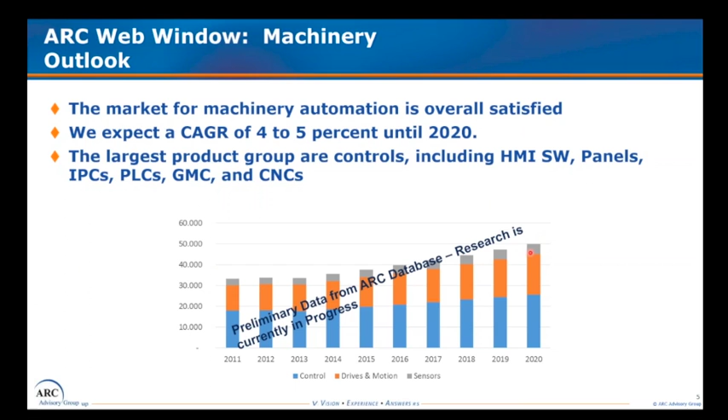Now turning to megatrends, the big trends that we see across all markets and regions that have a global impact and also impact the machinery market. People get very enthusiastic and optimistic talking about these megatrends because they see the opportunities in them. But we have to point out that especially in the short and mid-run, the business cycle has a far bigger impact on the development of the market than these long-run trends. They have the potential to increase growth, but in the short run, if the economy turns down, if the business cycle is down, long-run trends simply are overshadowed and do not matter.

The first trend I would like to talk about is the Industrial Internet of Things and Industrie 4.0, which really means we're talking about connected machinery, intelligent devices, and modular plants and automation. These three really go together. For the OEMs, this really means that all the devices need to be able to collect and pass on information, to have a good network infrastructure in place within the machinery, and to somehow enable this plug and produce as necessary.

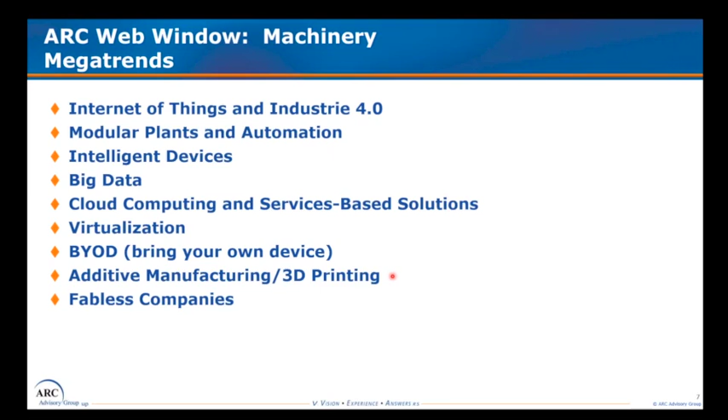It also means that we face a couple of new requirements for control. Scalability—if you have really modular production, scalability is required on a completely new scale. Also, the communication really needs to go down to the individual sensors and valves as you see it here, from a real centralized control station.

We're talking about new requirements from availability—here in parentheses, mean time between failure. This means the uptime really needs to be guaranteed. Machines also have availability or guaranteed uptime as a very important criteria, but looking at process industries which are capital intensive and hence require 24/7 production, availability becomes a completely new dimension.

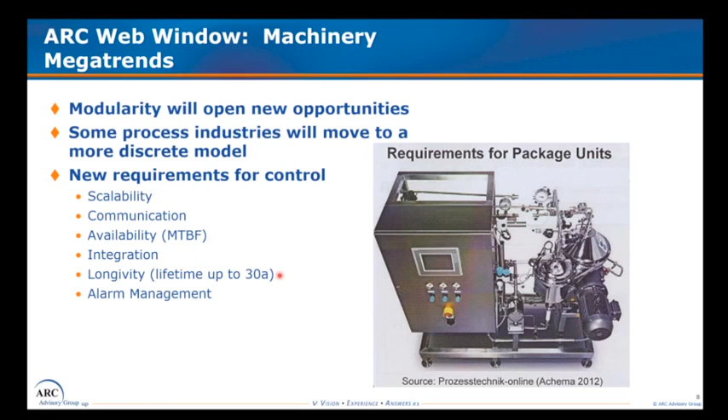And while current machinery for the discrete industries has a lifetime of, on average, between 8 to 12 years, these package units will be having a very long life cycle, up to 30 years. And we talk about very specific requirements such as alarm management as well.

Now, looking at these megatrends, we did a survey and asked around 400 people what impacts the buying decision on PLC or PLC-based PACs. What you see here on the vertical axis are the buying criteria. The most important was lifecycle support for hardware and software, and the lowest was integrated energy management. On the horizontal axis, you see the options we gave the respondents, ranging from no criteria to most important criteria.

I want to point out really two things. The first thing is a lifecycle support solution offering engineering tools. This also means that the top three criteria have nothing to do with cycle time and with scalability, because especially looking at PLCs, these controls have reached a level where they can basically be considered a commodity regarding hardware. The differentiation now is really about portfolio offering, about solutions, and the software and support delivered with the controller.

Second thing I want to point out, if we're talking about that now, is the aspect of integrated safety and integrated energy management.

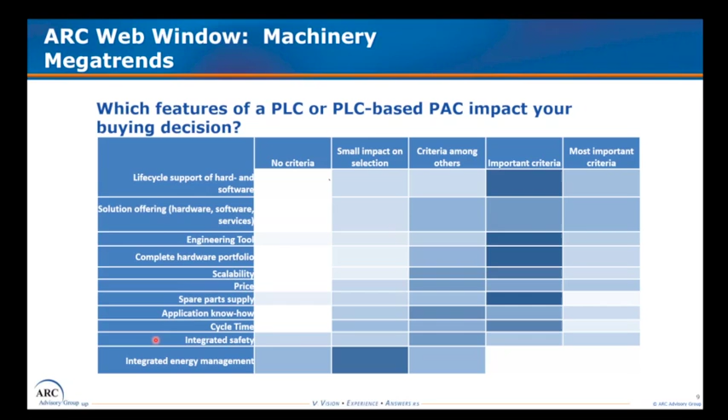And with this, I would like to hand over to my colleague Thomas Menze on the topic of machine safeguarding.

Yeah, it's my pleasure to talk regarding machine safeguarding. Thank you, Florian, for the introduction. Let's start with really a basic question, because my intention is to have all participants know a common understanding.

The most important question is really, what is functional safety? If we are discussing functional safety, it means we are talking regarding the safety relevant components of a machine control system. These components have to meet the intended reliability and the risk reduction of the machine itself. So this is really what we call functional safety. We are talking regarding the safety components. And please keep in mind, safety-related components quite often contain hardware and software at the same time. In some cases hardware is good enough, but normally you have a little software around to control the safety functionality. So what do we have to do to implement these safety-related parts?

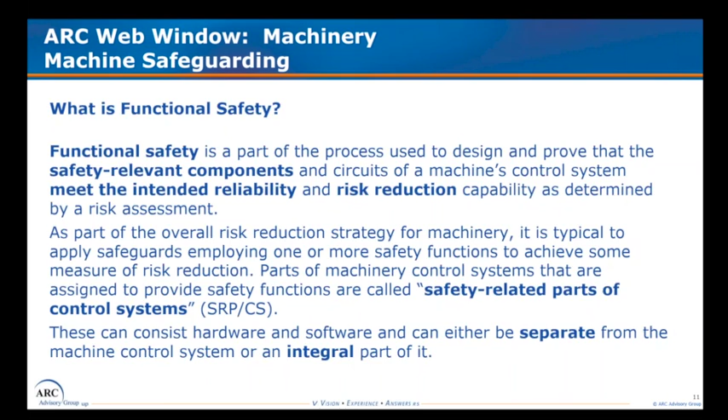On this slide, you can see on the left-hand side how to implement the safety functionality, shown in this little process diagram. First you have to do a risk assessment on your machine. If you've understood and evaluated all risks involved, the second step is to design a safety concept around these identified risks. Third, and last but not least, is to verify the safety function, to really verify that the implemented safety is good enough to keep the risk under control. On the right side of this slide, you can see a full safety-related component portfolio: the sensor, the logic, and the actuator. So if people are talking regarding safety components, keep in mind this is always a loop, and this loop normally contains a sensor, a logic, and an actuator at the end, because this loop is really responsible for acting the safety commands and doing the right things if any risk occurs.

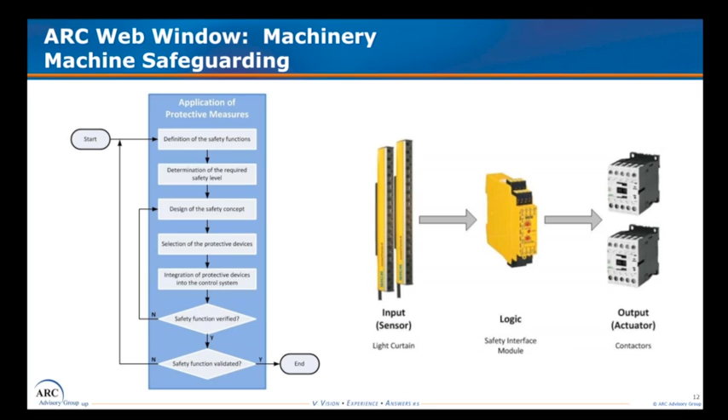Coming to the next point, we have to think about what are the standards. Are there any standards, or do we have to develop everything from scratch? The good answer here is no, of course we have standards and frameworks. Safety standards normally provide a framework for the implementation of the safety functionality. And don't forget, if you work on safety, safety has to be implemented over the full life cycle. It is not only the normal operation mode of the machine, so you really have to observe and do the risk assessment over the full life cycle. You get a little guidance from three available standards.

These three available standards are differently oriented. We have an A, B, and C standard. Normally the B and C standards are really the important ones for machine builders, because in these B and C standards there are the typical safety applications for given machines. So you have, for example, typical safety aspects in the B standards, or real examples of machines in the C standards. So if machine safety is quite new for you, it's best to refer to the B and C standards to see what's relevant for your machine type.

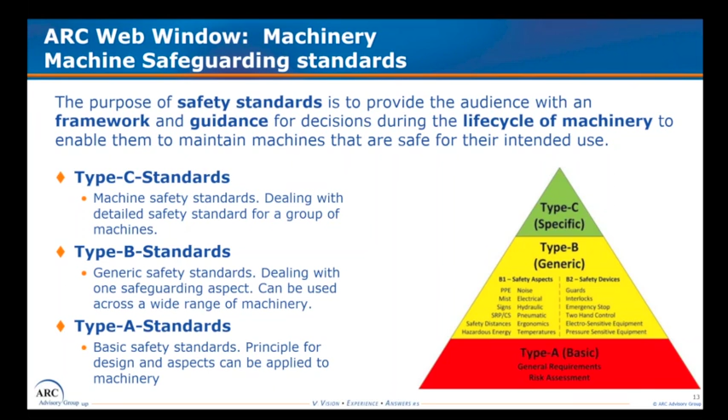Good news is SIL 4 does not exist in our industry. SIL 4 is only required in nuclear applications and sometimes in train systems, but you will not find SIL 4 in normal machines.

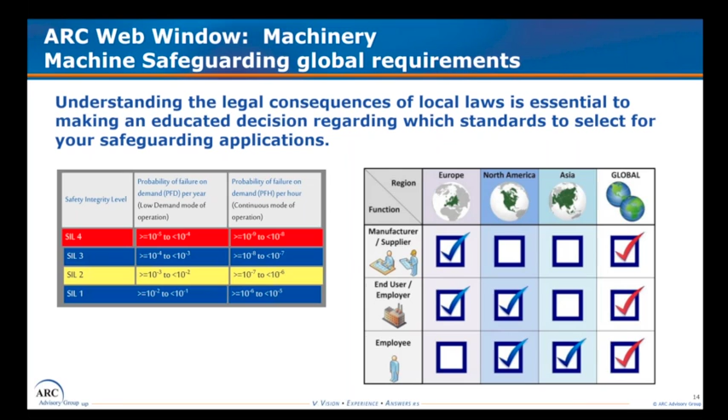Machine safety really does not add any productivity. It is really adding safety to the process, and this is shown on the next slide.

So Florian, please flip over. And here you see on the right-hand side a little scale, and you see safeguarding is explained as a balance of safeguarding, productivity, and costs. That's what I said earlier on. So you only get safety if cost and productivity is right balanced, and if you have done the right risk assessment, if you really engineer the machine itself. The safeguarding scope, the products or segments of safety aspects, are shown in the left-hand table. You see all the basic components, from top to bottom: the safety PLC, the configurable relays, the safe drive, the safety relays, and so on. These are all the components the engineers or automation people normally have to get the machine safe.

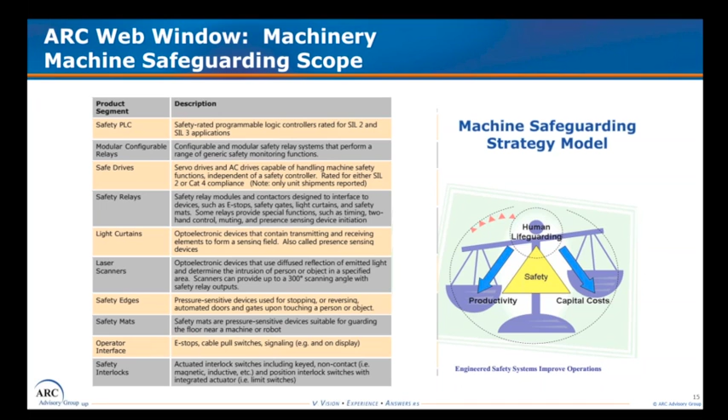I think that should be now enough for the introduction. Now we are discussing the market itself, and therefore we need the next slide, please. So here we see the machine safeguarding applications by SIL levels. If we check this overview, we find out applications like robotics, forming, or assembling require SIL 3 protection, because simply the risk is higher.

So if a robot, for example, has a collision with a human, that is normally very painful for the human. Because of that, he can be really seriously injured. The risk is quite high, and because of that, the required SIL level, so the safety integrity level, is high. Packing machines, material handling, or molding machines require only SIL 2, because the risk going out from these machines is lower. So these different risk levels really depend on the risk evaluation. You have to do the determination, you have to analyze the machine, and you as an engineer have to determine what risk reduction is required.

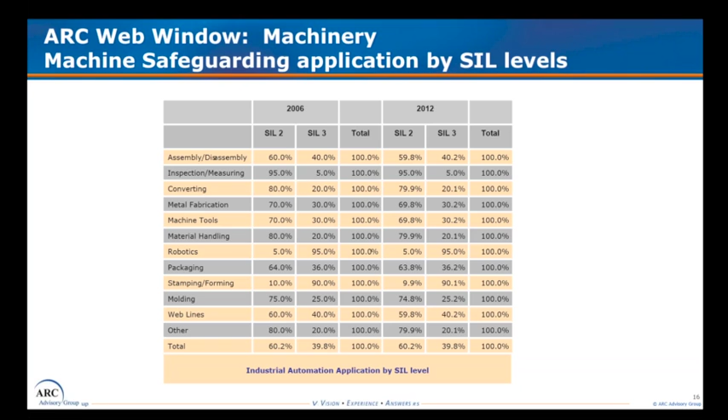Okay, if we dig a little bit deeper into the market and discuss the drivers and inhibitors, we need the next slide, please. We will find out that there are definitely drivers of this market, and that is what Florian said earlier on: higher productivity. At this moment in time, nearly every engineer tries to get more productivity in the machine, so it runs faster, it turns faster, whatever. Because of that, there's maybe more risk in the machine, and this higher productivity gains higher risk and higher requirements according to machine safeguarding. This modular automation does the same thing.

Florian explained modular automation in the first slides we discussed. And of course, if you assemble a production on the shop floor like Lego style, that means you have little production blocks and you can plug and produce those on your shop floor. There is maybe a higher risk level, so that is definitely a driver for machine safeguarding.

And last but not least, that is the last bullet point on the left-hand side: safety standards. The safety standards are from time to time increased. There must be more safety in the machines, and because of that, we have to implement more machine safeguarding. That is definitely a driver for the overall market.

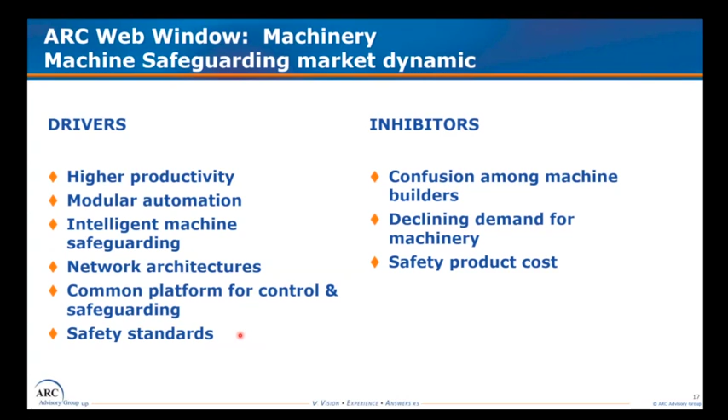So if we observe now the market itself, we need the next slide. We will see here the total machine safeguarding market from 2012 up to 2017. Definitely the overall market has a higher growth compared to the normal automation products. But please keep in mind, machine safeguarding market represents roughly 10% of the automation market. So it's a fast-growing market, but on the other hand, it's a niche market and relatively small compared to the standard automation market.

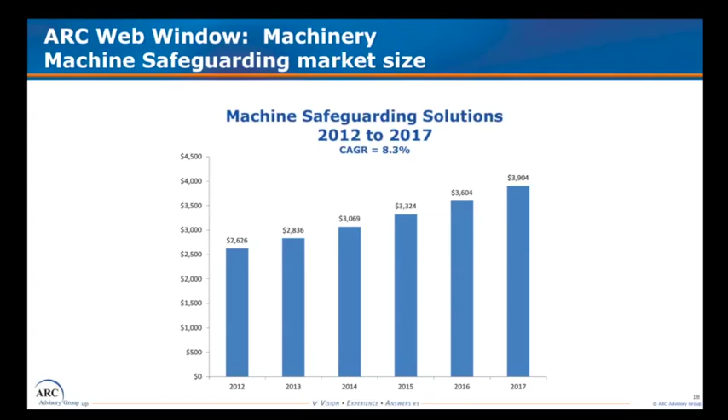So if we analyze really the individual products of these markets, we come to the next slide. Here we are, and we see there's a machine safeguarding installed base. If you analyze this little graphic a little bit deeper, you find out easily what the volume products are. And the volume products are really the operator interfaces, the safety switches, the safety relays, and the light curtains. So these products are really the driver in this market, and they deliver the highest revenue to the overall market.

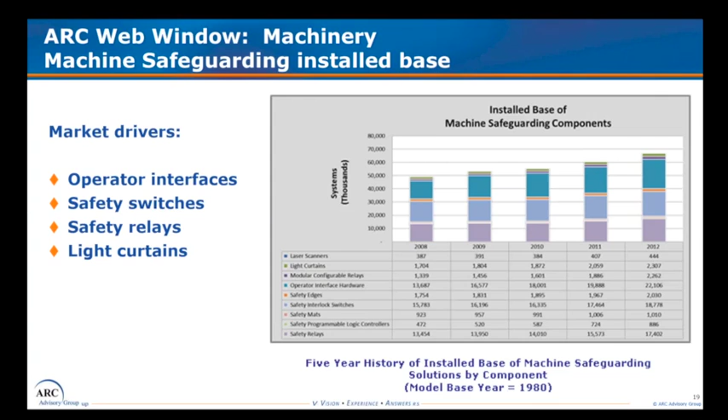So if we leave now a little bit the market and the products beside, and if we are concentrating ourselves on the market, we will find out that we have really different vertical markets for machinery, and these different vertical markets have different requirements for machine safeguarding, and you see that in the graphics on our display here.

If you analyze the graphics, you will easily find out 50% of the market is absorbed by 5 vertical markets. That means half of the market is represented by metal forming, packing, material handling, robotic, and metal cutting. If a customer or engineer really develops machines for these vertical markets, he's highly confronted with machine safeguarding.

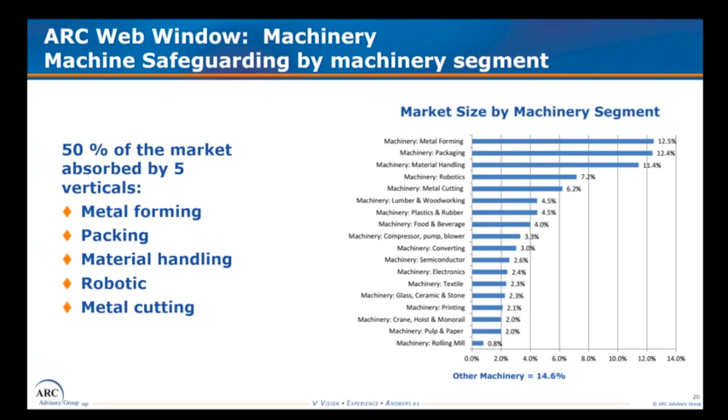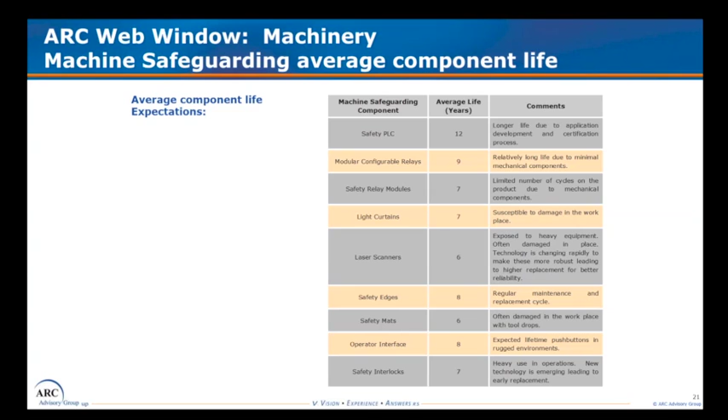And last but not least, on the last slide, here's the summary. What are really the success strategies on machine safeguarding?

I think Florian discussed this more or less in his intro: decentralized solution and intelligent technology. Intelligent technology belongs to industry 4.0 or the industrial Internet of Things. We discussed this, but the last topic, which can be quite important, is safety consulting, because safety or machine safeguarding becomes more and more complex, and many engineers struggle with that and look for third-party help. If experts are outside offering machine safety consulting, that could be a very valuable business, and definitely something that may grow very fast compared to the hardware and software in machine safeguarding.

So I think this should be enough for our little excursus regarding machine safeguarding, and I hand over back to Florian.

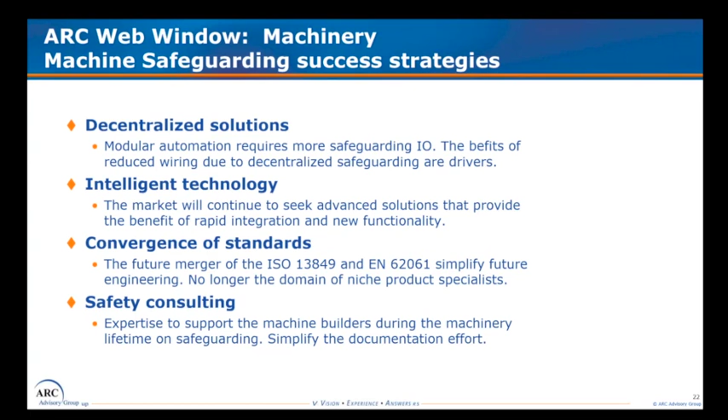Thanks, Thomas. Now, energy management — and not energy management as many people think of, big plants consuming a lot of coal, gas, oil, etc. But what can energy management do on the machinery layer in discrete automation?

Just to give you an insight first about the challenge: what you see here is the energy costs as percent of revenues, and on the vertical axis you see the different industries. It goes from 0 to 25%, and very clearly on top in terms of energy costs are oil and gas, metals, water and wastewater, cement and glass, chemical. These are the standard process industries.

Now looking into discrete manufacturing, really the top consumers, so to say, are textiles, consuming a lot of water as well as electricity. Plastics and rubber, especially injection molding machines, are very energy intensive. Food and beverage — cooling as well as cleaning with water — is very energy intensive. But overall, we don't have this huge share of energy as part of the revenue or of the cost, which also means there is not as much pressure on end users to implement energy management measures as there is on the top consumers here.

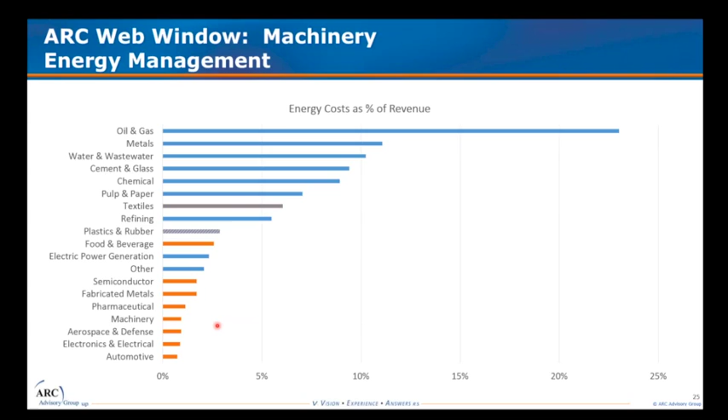Typically, energy management starts with simple metering, and unfortunately there are still many companies out there that do not know how much energy they consume — meaning energy in terms of water, air, gas, electricity, and steam. This is to many still unknown, as especially in the automotive or aerospace industries, it's often the facility management that gets the energy bill and not the production part.

After metering, we go to visualization. The visualization really starts with visualizing 1-2 meters at the machinery level, but then moves up to the complete production line, moves to analysis and reporting, which is already at the MES layer and includes management feedback. Then we go into real-time monitoring, optimization, and enterprise-wide optimization. Here it's very important at the enterprise-wide layer that it only makes sense if there are certain standards, because with these standards you can actually benchmark your facilities, or benchmark single processes or single machinery.

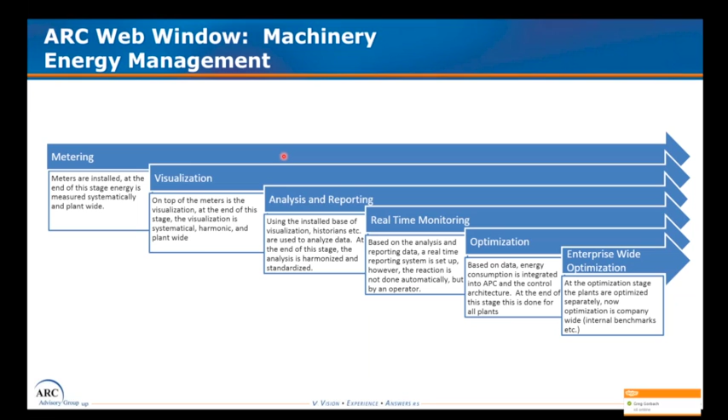For the machinery perspective, we are mainly talking about metering, visualization, and analysis and reporting. This can be supported and already done in the machinery. The latter is really part of higher level automation systems, which are typically in charge of the system integrator, EPC, or the end user.

We asked people from various industries if energy management has an impact on the buying decision, ranging from no impact to main driver for purchasing equipment. Again, discrete industries are at the very bottom. But what was lower on the cost side, automotive and aerospace, and food and beverage slightly lower, energy management does already impact investment decisions there. If you average that, you'd land at around a quarter of investment decisions where energy management has an impact.

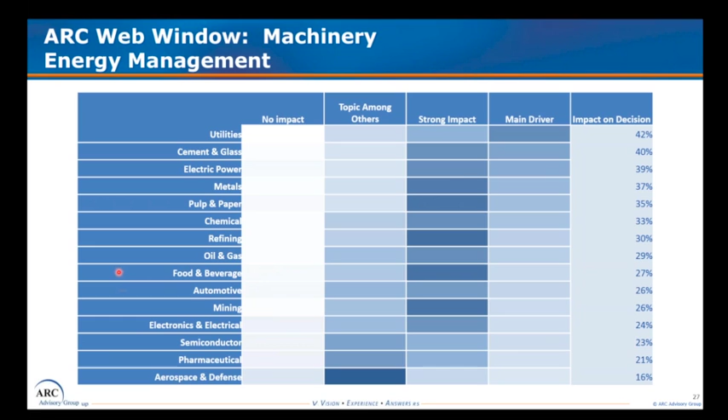One reason is that many automotive car makers, especially from Germany and Europe overall, push their tier 1 suppliers to implement ISO 50001, even though they have an energy cost share of around 1 to 2% of variable costs. So it is not only costs that drive energy management measures, it's more.

We asked what are the targets for energy management. The most important target is to reduce costs, but it also has to do with planning future consumption, optimizing overall processes. An energy efficient process is typically an overall smooth and efficient process. They need to optimize purchasing and scheduling with suppliers, pass on costs. So it's not only simply reducing total costs, although that is the most important criteria.

Planning future consumption will be more and more important as we expect. Really the scheduling with the energy supplier and utilities, as even now process plants have to do load shedding in certain parts of the world. Future cost planning - energy prices are currently down, but they are still volatile, which means it's very hard to forecast your energy costs for the next month if you don't really know what's going on in your plant and how your consumption will change. It really requires detailed measurements and deep integration.

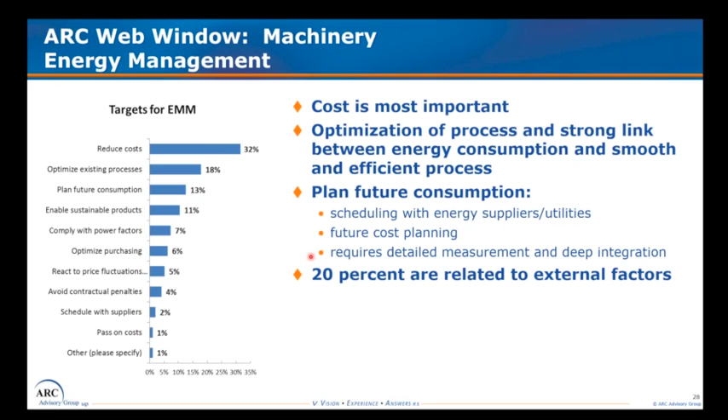So, summary of the status quo: energy management is and will remain a priority 2 topic. This is unfortunately a fact, and we have to keep that in mind. Throughput, production quality, output, safety - these are all priority 1 targets, and energy management will be a priority 2 target. Especially looking at factory automation, energy management is in its infancy.

But more end users look into energy management. The number is really increasing despite the currently low oil prices. ISO 50001 was really the fastest adopted ISO norm, many people told me in interviews, even faster than 9001. Automotive end users pressure their tier 1 suppliers to implement the 50001.

This I already mentioned. The energy costs will rise in future. Now, I know we have low oil prices right now, I know energy is currently rather cheap, but this will change. We have an indefinite demand for energy and a finite source of energy - it's very simple math to calculate that energy costs will rise in future.

We have an increasing number of end users that force their OEMs to integrate energy management right from the start. We had a few interviews with companies from the electronics industry, and they say energy is an important cost factor, and they want their OEMs to enable them to read out the machine's consumption data directly, rather than having to install meters and everything in parallel later on.

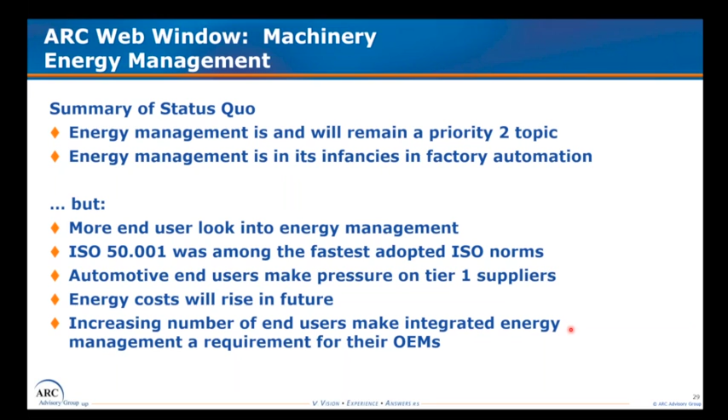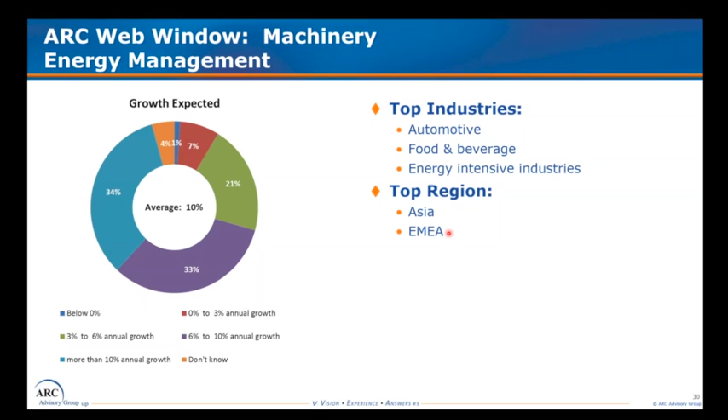This is why we expect an overall growth of around 10% in energy management. For industries like automotive, food and beverage, and some energy-intensive industries, that growth rate will even be higher. Remember one of our first slides - we expect a growth rate of around 4% for the machinery segment, so this would be more than double. It's not an unattractive market to be in. The top regions will be Asia as well as EMEA. We do not see much impact from North America right now.

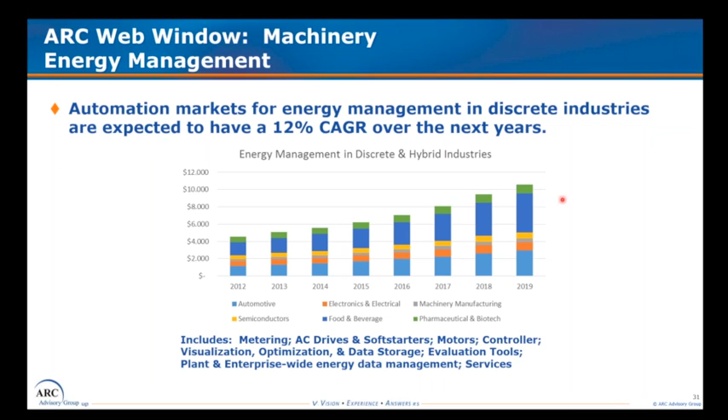So that was it from my side on energy management, and we can come to the Q&A now.